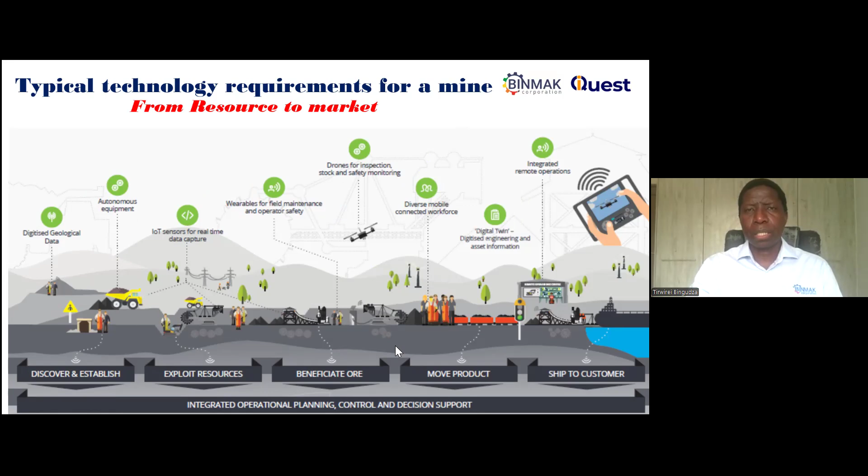And that's what's making it exciting, that we can actually do these things. And the technology that we will be talking about today actually enables this, and I'll be able to share with you some case studies around these sort of things.

And this is an example again of someone in a plant. The idea here really is it's now an expected, not a nice to have, that if I'm walking around a plant or a factory, I should have all the information on my fingertips, whether it's the schematics, the engineering drawings, the inspection forms, the videos on training, if I'm not understanding how it works, the failure modes, the real-time performance, alerts and alarms, any safety videos, everything must be available on the fingertips, on my tablet, on my cell phone.

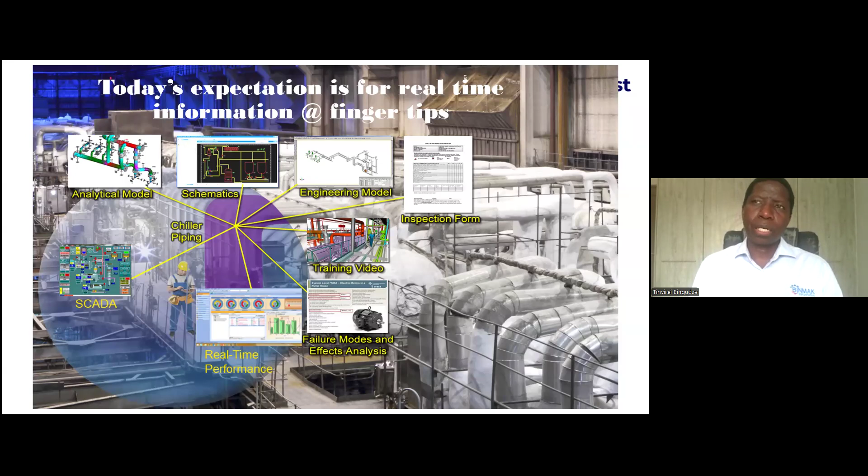And that's what the technology really, in terms of Internet of Things and the digital twin - and we'll talk a lot about smart sensors as well, because obviously for you to get this information, you need the sensors that are in the hardware that's actually physically installed that will transmit that information, and we'll touch a bit about that.

So jumping on to digital twins, I think this is one of those things which is sometimes not easy to explain, and sometimes it's just a buzzword, and people might even say, why do we need them? So this particular example that I'm going to be sharing with you is actually some work that we've done on some thermal power stations in the region.

So the idea really, and it's complex in terms of if you think about, and you'll see when I show you the sort of 3D model of these things, there's lots of tubing inside, literally 600 kilometers of tubes inside, and there's mills, and there's pumps, and there's a lot of physical hardware, which is complex to understand.

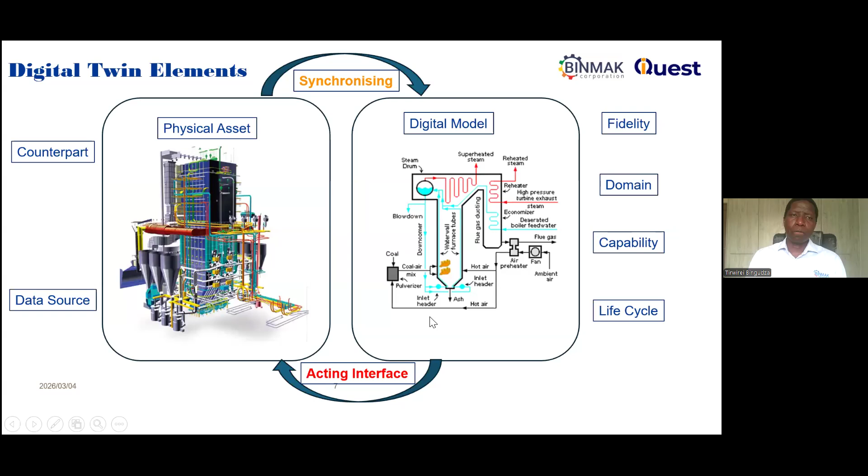And then on the extreme right-hand side here, we make sure that we define what domain it is. Is it for simulation? Is it for function monitoring? Is it for predictive analytics? And we define the capability and we define the life cycle of that digital twin. What's important with the digital twin is that we can play around with the digital side without damaging anything. We can simulate. Once we're happy with the results, we can feed them back to the left-hand side.

So this one here is maybe a bit more detail about what a digital twin is and what it does. We have again, on the left-hand side, the counterpart, which is the physical source, which is actually the one that has the data. We do what we call a physical to digital transformation on top here. We synchronize that with our digital twin.

Where it becomes a digital twin is where we play around with the physics. So we now derive physics equations. These are regression equations, predictive analytics, a lot of complex computation to say, okay, for instance, if you take a power station boiler - is it affected by the quality of the coal, or is it the quality of the water? What physics - if it's the temperature, is it the creep? How does temperature affect it?

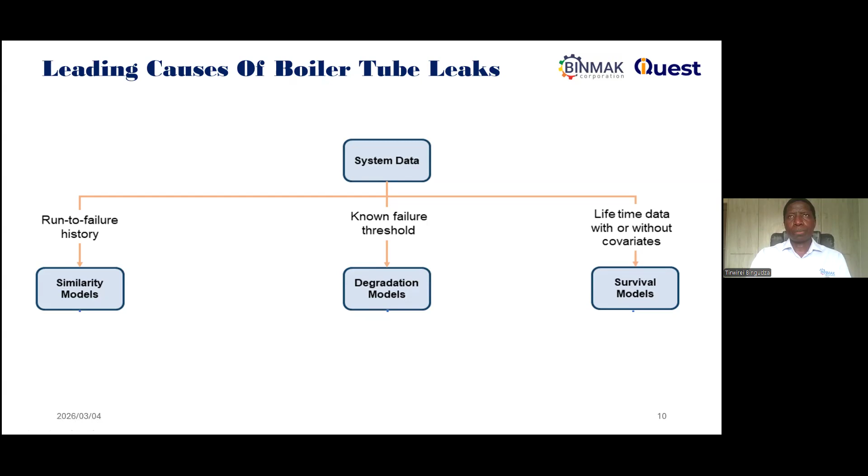So when we talk about remaining useful life, we can track thousands and thousands of data points, which is where the sensors come in. Without this information - if we are still writing things in Excel, by the way, that is not digital.

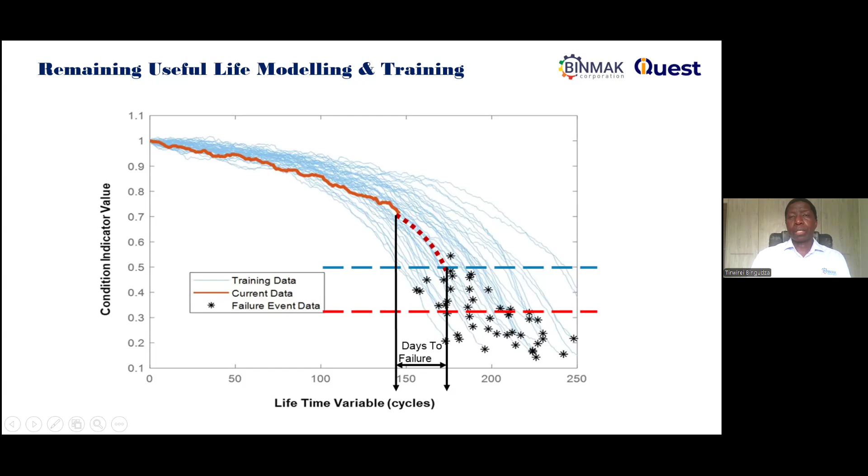Then we do something about it, or we take decisive action, or we take evasive action. So that's kind of how we use the data and the regression models to predict what's going to happen. I mentioned earlier on the issue of sensors.

So again here, we've implemented, in our case, technologies like iQuest technology, which has hardware, smart sensors. It has gateways. The gateways are what communicate with the cloud. So we do get the information from the sensors, communicate to the cloud. But we also have machine learning algorithms that play within this technology.

When we look at the actual sensors themselves, particularly smart sensors, they've got multi sensors in them - typically vibration sensing, temperature sensing, as well as ultrasound, etc., in one sensor. You can mount it using a stud, you can glue it on, and also even magnetic mounting.

And what's important here on the right-hand side is edge computing. So these are smart devices - it's actually a little computer sitting there on the bearing or on a pump, and it actually is doing quite a lot of computing on its own because of what we call edge computing. It doesn't need another set of computers to compute. It computes and then sends information directly to the users.

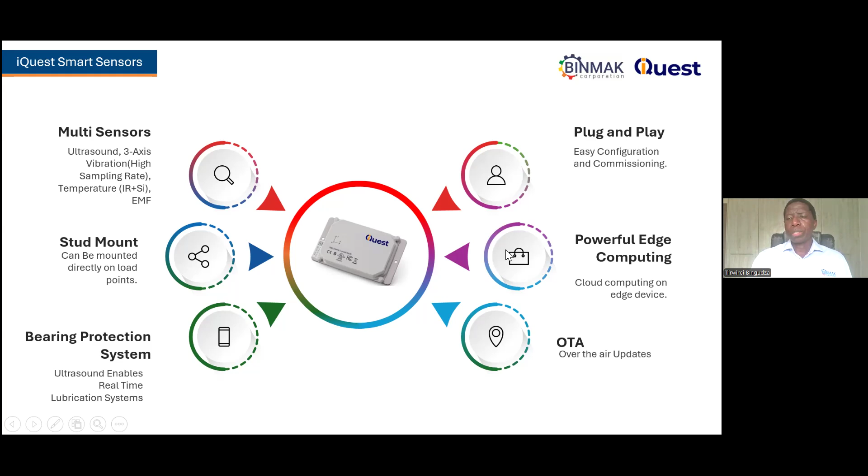Either via cloud - we ourselves use a Microsoft Azure IoT Hub, so that we can actually look at this information from anywhere on the planet, really. We can communicate with the devices, and you can remotely monitor and also have over-the-air updates.

So that's basically it in terms of the summary and the background. I'll just then jump into the digital twins, as well as a case study of a municipal - so digital twin of a power station and a pump station. And then we can also look at another example of AI-powered code of practice in real life.

So in terms of one of the digital twins that we piloted, it was on thermal power stations. So these are very complex, and as we know, when they fail, we all are affected in the country because of load shedding and things like that.

But they say if you want to go duck hunting, you must go where the ducks are. So 37% of all the outages are actually due to boiler tube leaks, and it's a very complex, very difficult thing to solve. As I mentioned earlier on, inside the boiler it's 1600 degrees Celsius. You can't really go in there to do much for 18 months. So you need to make sure that whatever you do can last 18 months.

Review of failure data suggested that if we can tackle that difficult problem, it will have the most benefits, because 70% of all tube failures result in outages. Therefore, if we can have an early warning system and early detection, we can help enhance reliability.

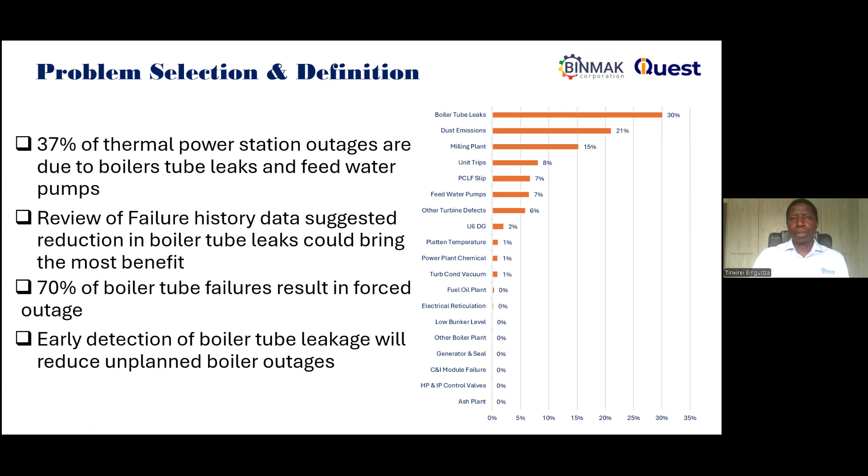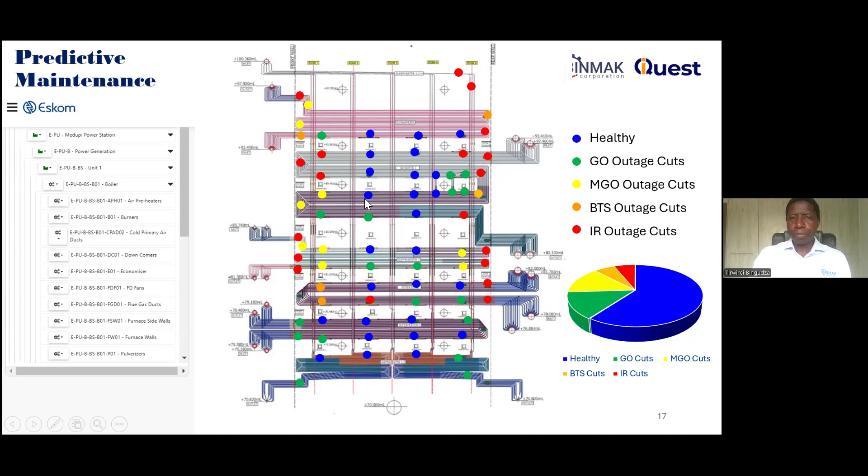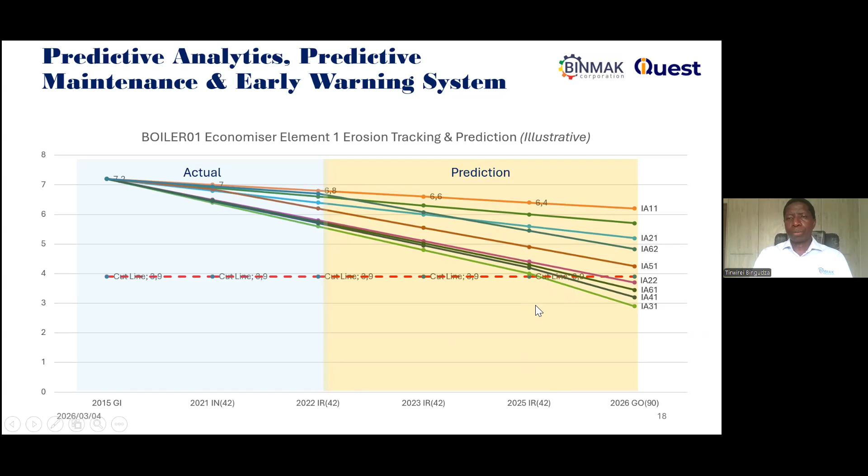It's likely to burst and then cause a failure. So we're predicting here when each of these points is going to reach that ultimate tensile strength where it's likely to fail. In this case, we started in 2022, we predict, okay, this is going to fail in 2025. So before you get there, do something about it.

So I'll now go in and show you an actual example. I'll try and demonstrate an actual case study.

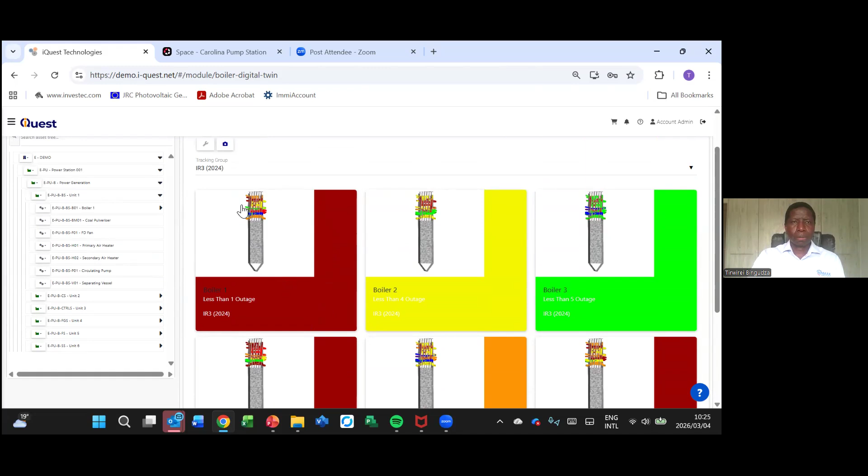And then if I just click on it - hopefully my internet connection works here - okay, sorry, it's going to be a bit slow.

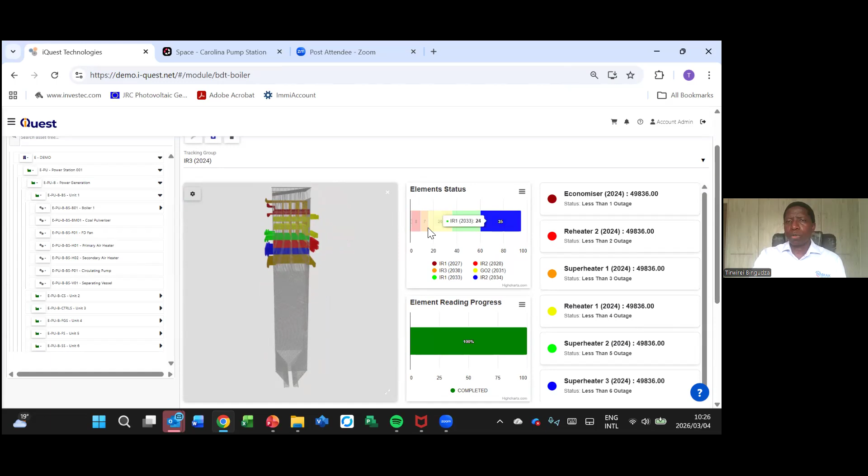This here summarizes the total condition of those tubes and their condition, and down here is a summary of the same data as to when you must go in and cut it.

But if I just show you briefly, when we say it is quite complex, this is that whole structure I mentioned, all the boiler tubes. This represents the entire tube bundle, and this structure from top to bottom is 110 meters high.

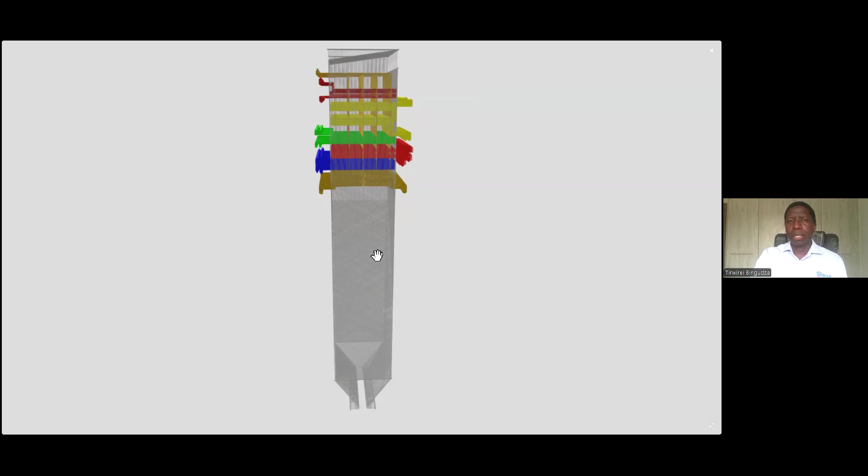But it's not just a mesh - when you zoom in, you can actually see that these are tube circuits. These are tubes, for instance, that are spiraling from top to bottom.

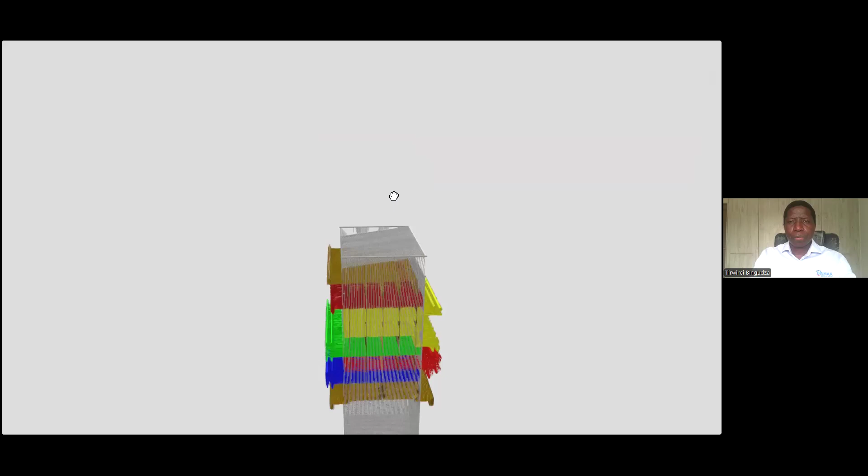And then if you look in more detail on the upper levels here, you can actually see that these circuits are quite complex, and you can play around with it literally as if you are in the boiler itself, and see how complex these circuits are.

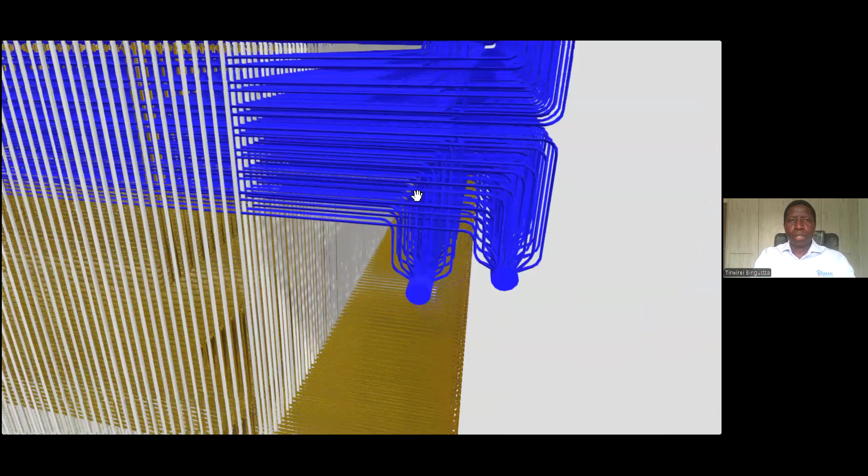So any of these points can fail, so you can go in and zoom in and look at each of those circuits.

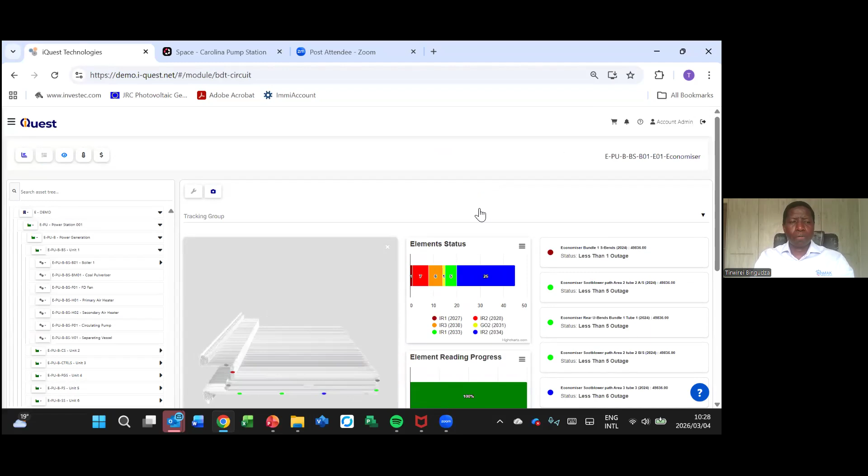Now if I want to zoom into, for instance, the top one, which is the economizer, this helps because typically for maintenance personnel it's very difficult for them to actually have a full view of everything. But with this, it allows them to zoom into one of the circuits.

So now I'm zooming into the economizer, and I can go into a lot more detail to see what's happening. And each of those circuits, as I said earlier, is actually not just... sorry, my mouse is too sensitive here.

I just wanted to show you that each of these is actually a numbered area where you can go in and actually see the number there. I don't know if it's visible, but you can see what I'm saying, that you can actually go in.

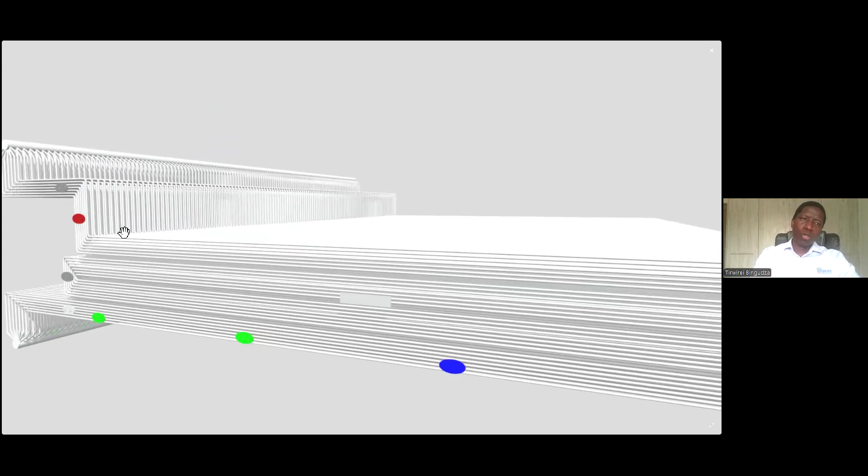If each of those areas is color-coded red, it means there's something in there that's going to fail. It's an automatic indication that I can see in this boiler there's one point which is in the red, somewhere in the green, but I can go in and actually physically look.

So this is very complex, as you can see, to try and go in there and figure out what's going on. And if one of these tubes in the middle fails, typically how you would repair it, you'd cut everything from top to bottom, get to the bottom one, weld it, fix it up again. That's why the outage takes quite a long time, and it's very expensive, costing billions and billions of rands.

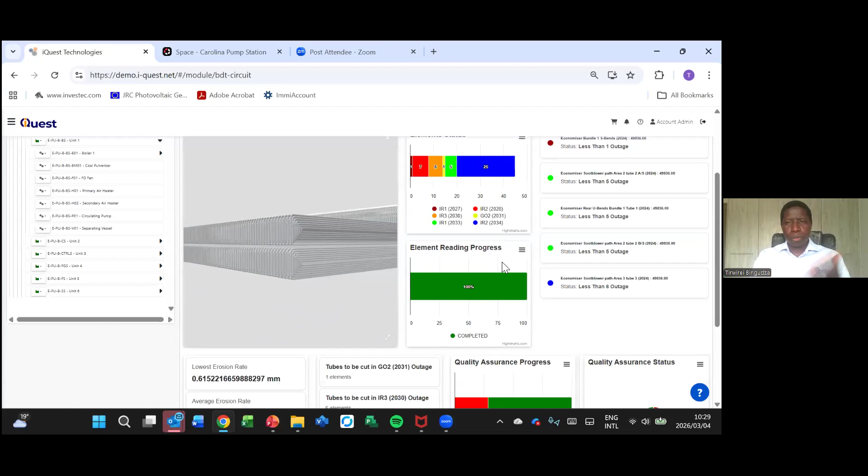So in this case, we're able to build these models and see virtually and in real time what's going on with these elements. And if I double click into that bundle, I can go into that prediction model I was talking about earlier, because I can now actually see what's happening.

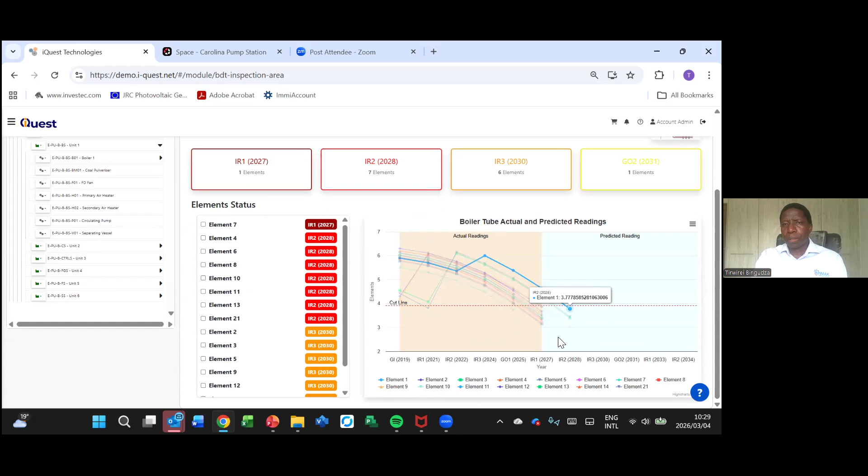Each of these is a measurement point, and I can see when it's going to cross the cut line, when it's going to fail. And I can go into even more detail within each of those.

Again, I won't necessarily go into a lot of detail, but we can go into each of the circuits and see what's happening, each of the elements, the actual measurements. So you can drill down and see.

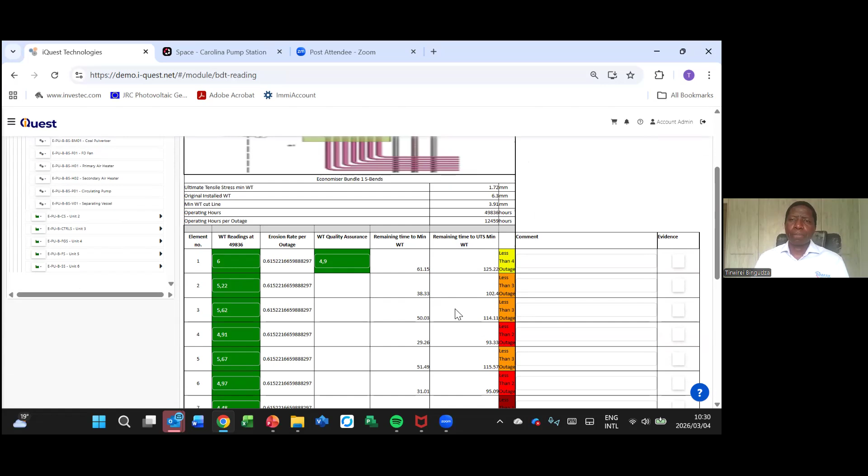So this is an example of these colors, now element by element. Each of these things, there's 192 tubes across, and there's a lot of detail there. Again, I don't want to bore you with the details. I hope that makes sense in terms of what that means.

If I go into the next case study, it's on the municipalities. This is a municipality smart water system, again around service water delivery. We've been hearing a lot about water - even the president is now focused on the water supply situation in the country.

So we did some work with a municipality in terms of making sure the assets are reliable - the smart water issue. Non-revenue water is massive; in some municipalities as much as 40 to 50% of the water is unaccounted for. With smart technologies, we're able to assist by monitoring the condition of the equipment, the pumps, the pipes, and also detecting where those water losses are happening, to enhance water supply reliability and even quality.

We're able to use smart sensors to measure the quality of the water in real time. The municipality we worked with said they test their water at the pump station and it's okay, but somebody down the road, a kilometer or two from the pump station, complains there's E. coli in the water. That's because somewhere along the line a sewage pipe has burst, and also the water line has burst, and the two mix, so you end up with sewage at the end of the line. So we can detect this even within the dams themselves.

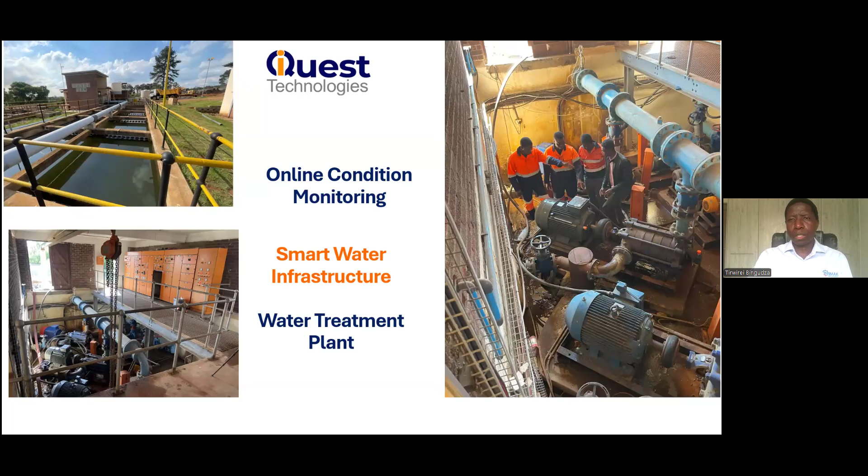But what I'm going to share with you now is at the pump station. You can see that was our team there doing the installations. Maybe before I jump in, I can just show you - we did those pumps, tanks, and those sort of things.

But maybe let me share with you before I jump in - let me go back and show you briefly. How do I get to this here?

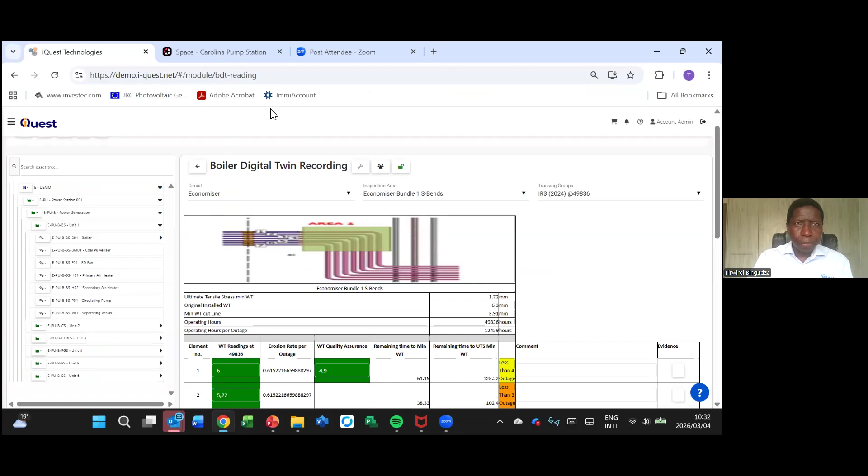Again, the ability we have with the technology is to make it real. So this is the actual pump station, and you can literally walk in the pump station as if you are there. You can swing in, you can walk back and forth.

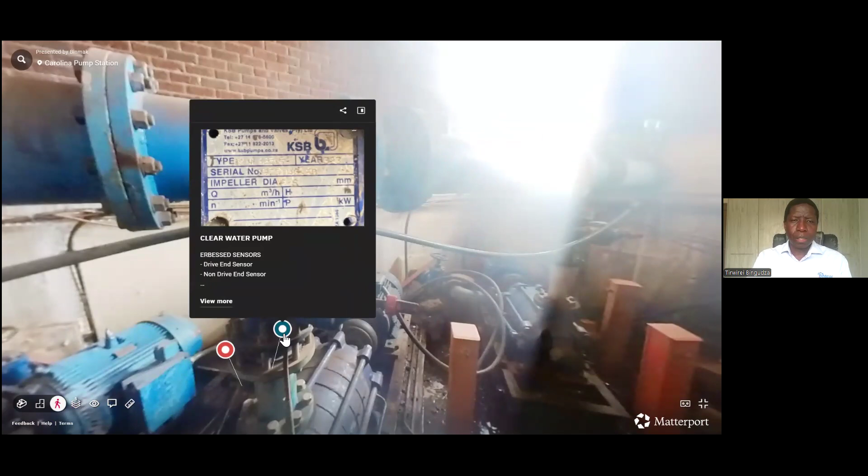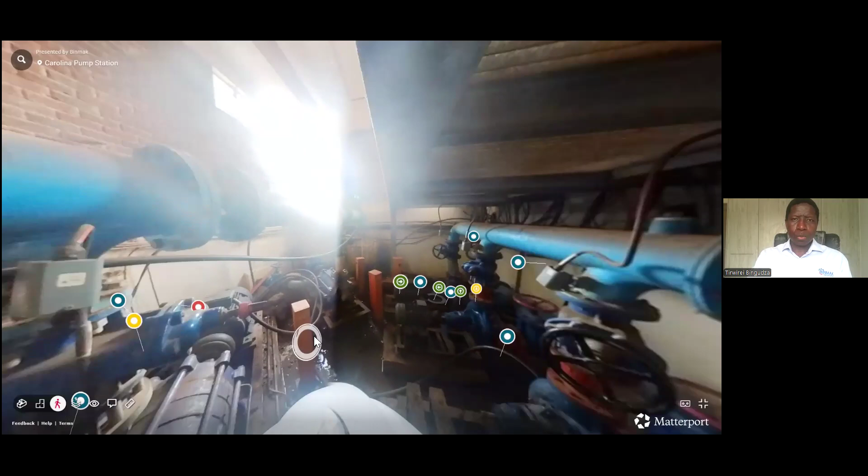You can see the condition. So if I zoom on to that one, I can see the details of that pump, what's happening to this pump specifically, what's happening with that bearing, what's happening to that. And I can get this transmitted to me directly wherever I am, so I don't have to be at the pump station to see. I can walk up and down the stairs.

It's almost like I'm there. I mean, literally better than the guy who is there. So that's the power of doing these sort of 3D models, and it makes it real. I won't spend a lot of time on that.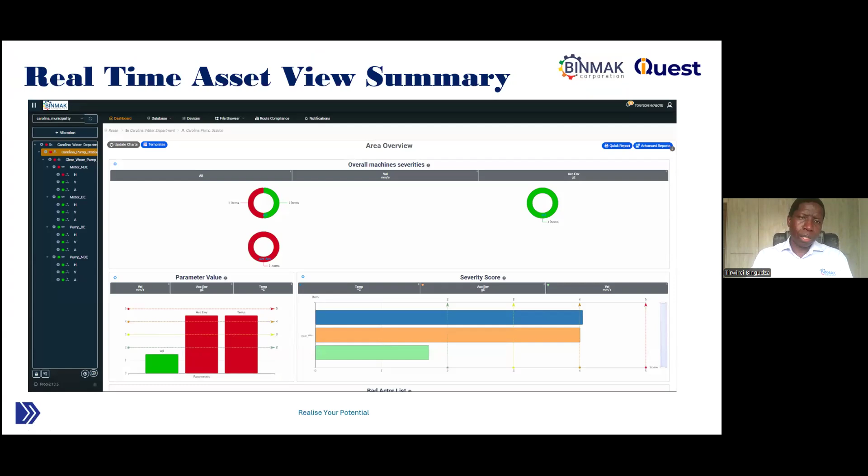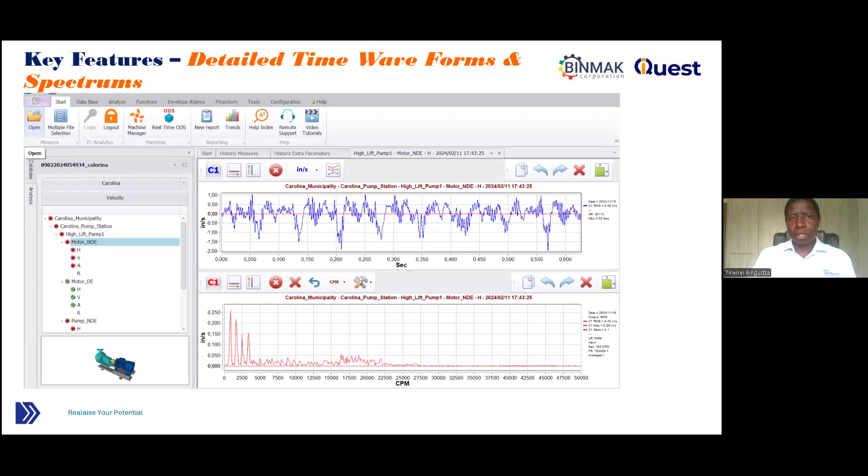Okay, the next case study is not really a case study; it's an example of AI-powered code of practice. So in terms of safety, in a lot of mines we work in, there's a lot of incidents where, in most cases, invariably, it's about a code of practice or a safety practice that hasn't been adhered to.

With AI, we are able to actually assist. These days I am amazed — even every other vehicle coming onto the market has some intelligence. Some of those new vehicles, it's very difficult to crash them, because it tells you, you are about to cross the line in the middle of the road, or there's a car coming, or you're about to bump into something. So there's a lot of technology already out there; we just need to put that in our working environment.

So here we can digitize work procedures, make sure the work is done right, done safely. And also with staff turnover, we've lost a lot of corporate memory. I was amazed listening to the radio driving yesterday, when the city of Cape Town had to bring in 62 retired people to just get back that corporate memory that left when those guys retired. But with digitalization and AI, we're able to actually get that corporate memory and make sure it's available to safeguard that, especially when it comes to safety.

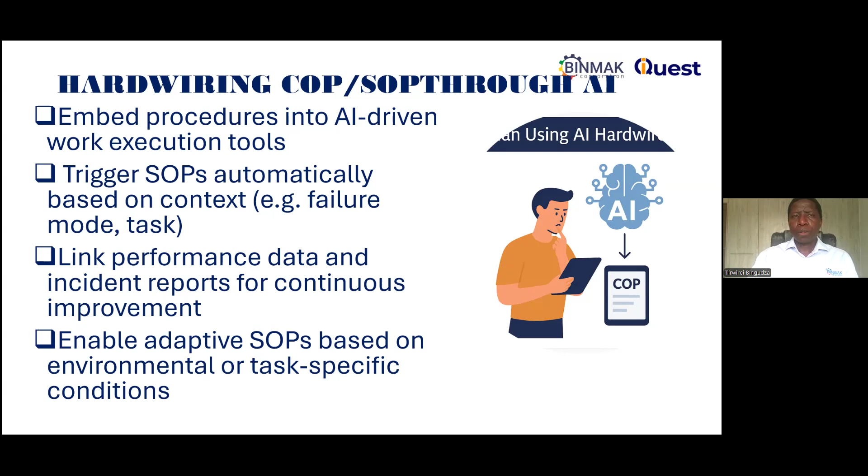So we need to embed procedures into AI-driven procedures and link them to performance and link them to how specific tasks are being implemented. As an example, I don't know Sean, does this sound come through when I play a video?

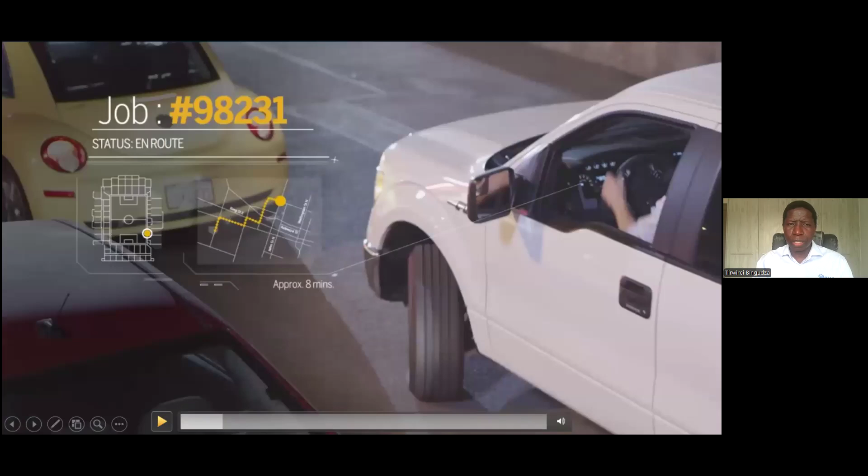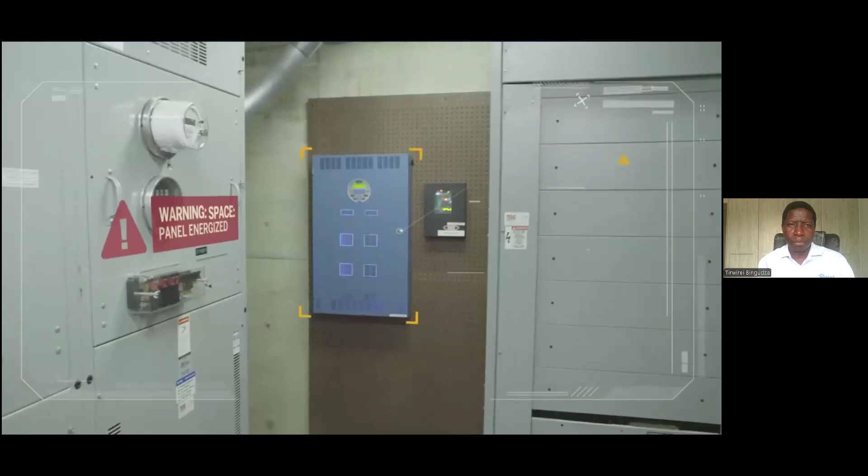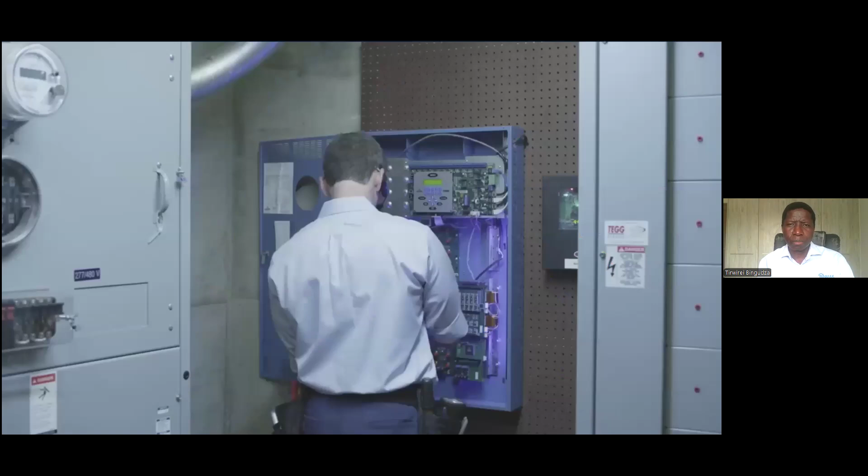Job started. Directions: walk 50 feet, then turn right. Waiting to hear if there's a problem. Warning, confined space. Panel located. Enter code 72. Initiate relay. Disable active circuits. Disconnect cable. Remove unit. We've been told the problem with the lights is being fixed. And there they are, the lights are back on. Call Phil. Calling Phil.

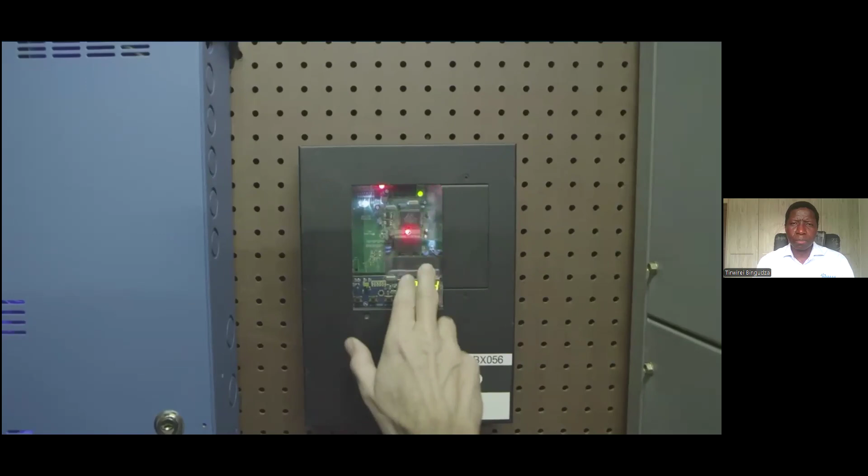Yeah, this doesn't seem quite right. Let me take a look. I'll take you through it. Hit the relay button, okay, then 784. Got it. Yeah, it doesn't seem quite right, but it'll be okay for now. I'll put in a work order for next week, Phil. Thanks for your help. New work order submitted.

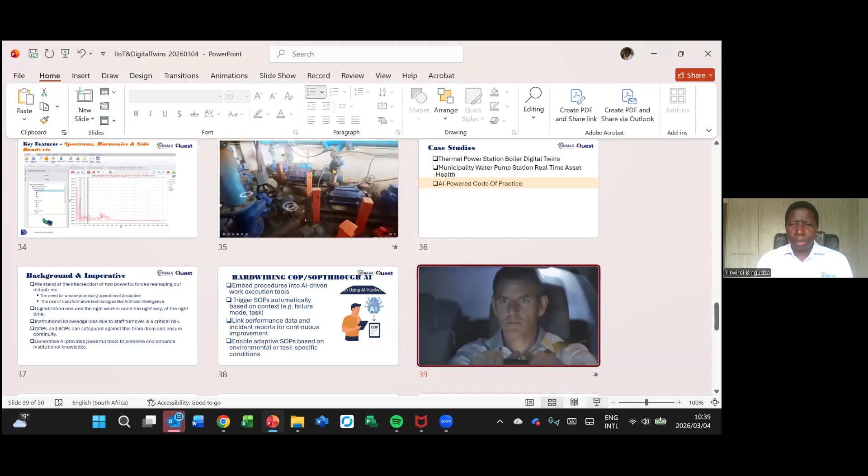Okay, so yeah, and again these things are available. So maybe in conclusion, the technology, IoT, digital twins will have a big impact.

And obviously the way to actually implement these things, initially we will typically do an initial assessment of the requirements. We have to have a clear definition of the problem we're trying to solve. Typically the next step will be to do demos so people can see in real life what's happening. Then in most cases we'd need a proof of concept as well, to make sure the technology will work in that environment. And then you pilot the technology, and then you implement.

So for instance, that point that I showed you on the municipality, we did the pilot, and Salga was saying, okay, now what do we need to scale this up to the rest of the municipalities, for instance.

Okay, so the next step is about just a discussion. I think Sean will probably lead the discussion in terms of implications for procurement processes.

Thanks, Sean. Well, thank you very much, TNT, and fascinating. Thank you for sharing that. I guess that last video that you shared can be done now. I mean, that's not some futuristic thing. It's doable now.